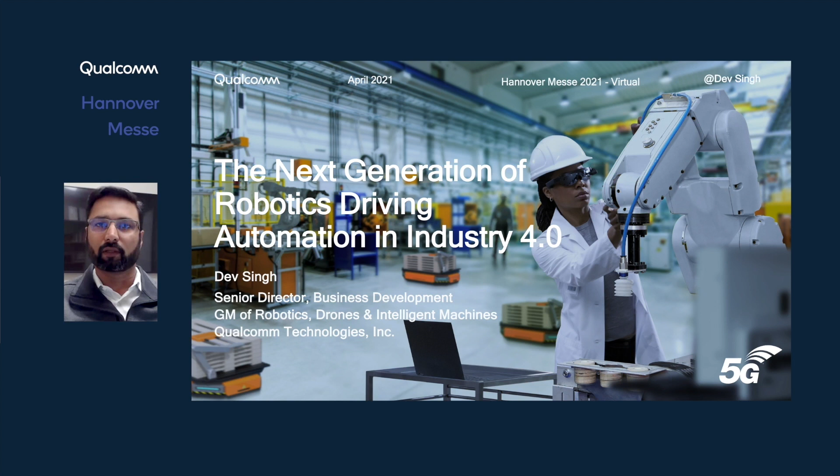So before we go into the topics of the presentation, I'm sure most of you are familiar with Qualcomm, but just giving a benefit of doubt, Qualcomm is a leading innovative company. We've been innovating with sustained innovation over 30+ years. We spend over $5+ billion in R&D year on year. Cumulatively, we have $64 billion in R&D put in, making sure we have the leading edge technology, which results in over 130,000 leading patent applications and creating technology that's revolutionizing how the world computes, communicates, and connects.

So Qualcomm has digitized mobile communication, redefined computing, and now we are transforming industries. Qualcomm has all the assets and is pioneering technologies that are fueling this future, be it connectivity from anything like low power Bluetooth all the way to 5G and everything in between. We have the technology that we are building. And on processing, compute is important. We have a lot of processing power in our Snapdragon chipsets, including CPU, GPU, DSP, and all of it.

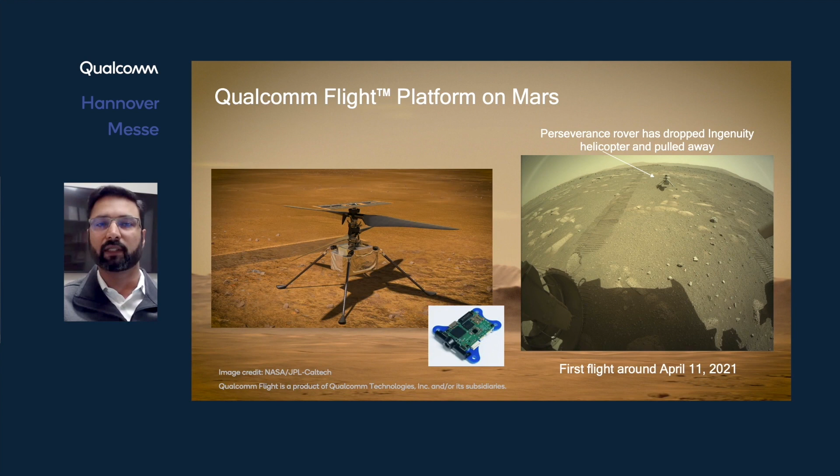We have been doing this for over 5 years now, since I set up this business segment in Qualcomm. We've had numerous robotics products launched. We are deploying millions of robots, be it consumer, enterprise, industrial, or factory robots. And the scale is limitless. We are putting floor scrubbers in factories to also putting our chips that are powering the Mars mission. The Ingenuity Mars helicopter is powered by Qualcomm as well.

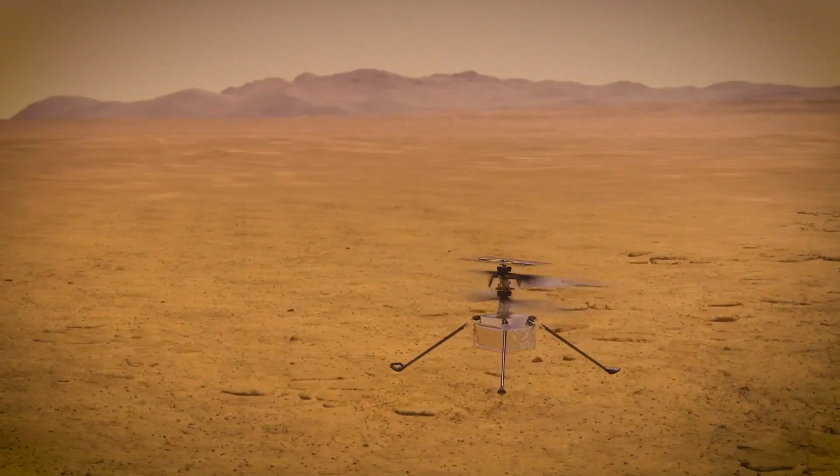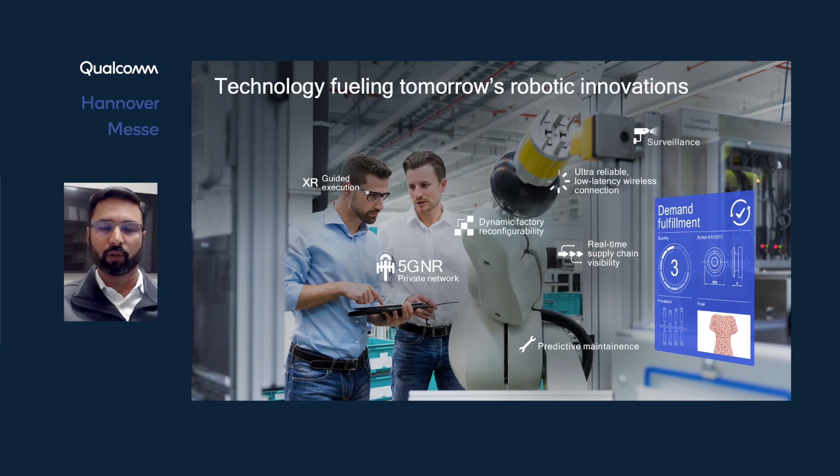Today's topic, I would want to cover the technologies that are fueling tomorrow's robotics innovation. Those primarily are heterogeneous computing, distributed intelligence, AI, and connectivity. So let's go briefly into each of these, starting with heterogeneous compute.

So heterogeneous compute, we all know that compute is very, very important in automation and in robotics. When you talk about computing, anything that comes to mind is a CPU or GPU, but the magic is, or specialization is key for automation and robotics. Assigning right tasks to the right engine is key. You want to use energy efficient engines for things that need low power, real-time applications. You need sequential control, you would use CPU. And when you need parallel data streams, you would use GPU. But all of this needs, like we mentioned, a specialized block for that.

We also have blocks that do dedicated neural processing engines that do AI with ultra fast inferencing. And one other anecdote we have is computer vision. Traditionally, computer vision was done on CPUs and GPUs, but we know that it is much more efficient to do that directly on a computer vision accelerator. In our Snapdragon processors, we have CVP, or CV enabled ISPs, that offload the GPU and CPU from these tasks. So that's the heterogeneous compute. It is the foundation of building the right automation and right robotics products.

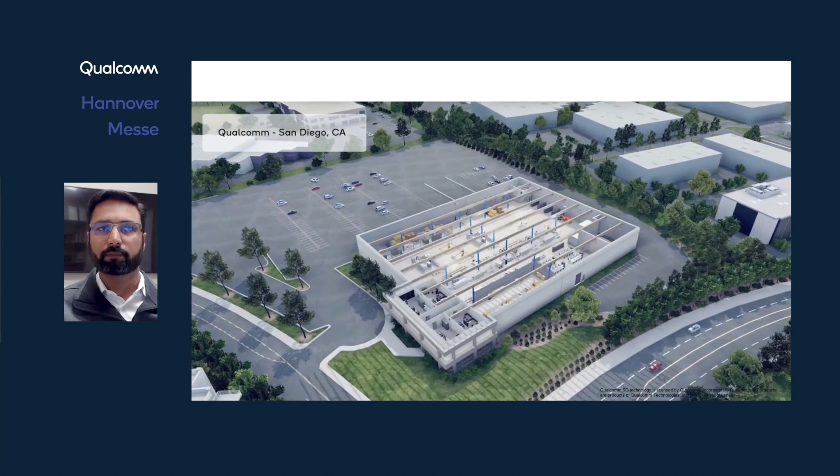So let's talk about a few of these, specifically around time-sensitive networks. 5G not only is a technology of the future, but it also helps maintain continuity, upgrading existing industrial networks with wireless 5G. Today, machine-to-machine communication is done using Ethernet, so Ethernet over wireless is possible with 5G, and we will see some of these. Time-sensitive network is one of them, and we have a brief video to go over that.

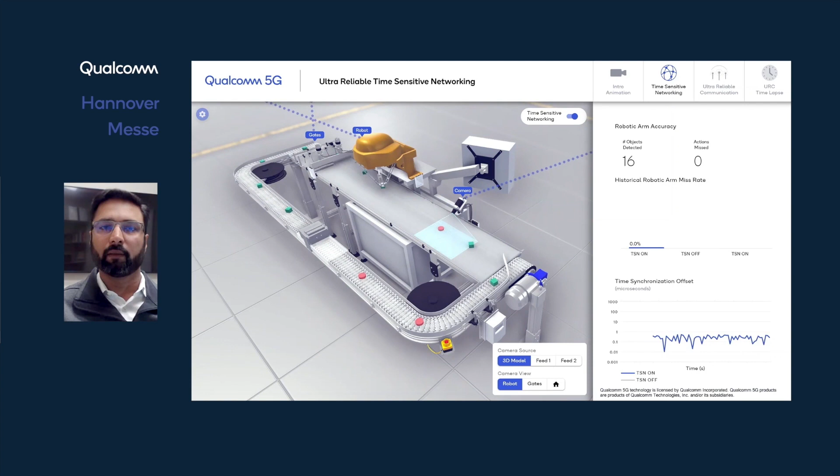In this video, you'll see a conveyor belt on a manufacturing floor where you have a product moving on the conveyor belt and being observed by cameras, and those are connected with 5G. These cameras are communicating with the robot, the Delta robot, to pick up the product based on the binning.

In this demo, you will see with time-sensitive network on, the green and red pucks representative of different classes or bins of products. When the time-sensitive network is on, the accuracy of this picking and binning is 100%. But when the time-sensitive network is off, you will see a lot of misses. So that gives a brief overview of the impact of 5G time-sensitive networking, where tight communication between machines is very important for these kind of applications.

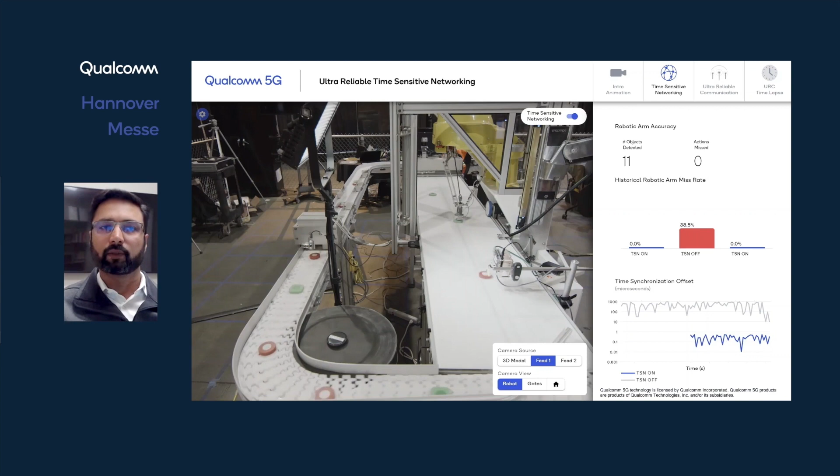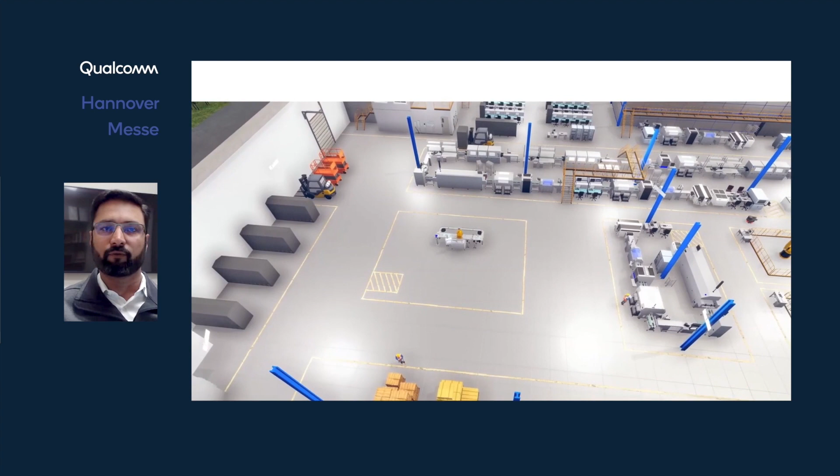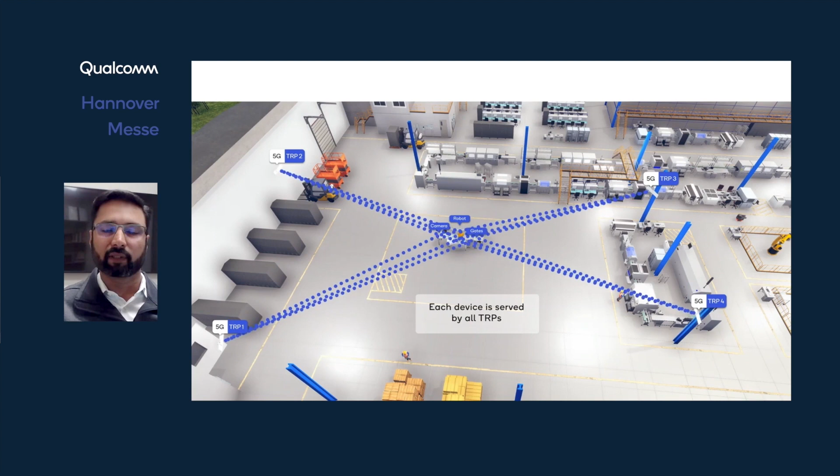So next one is the ultra reliable low latency, and we'll see a quick demo of that as well. This is also in a factory floor. So now we are talking about wireless communication in the factory floor, cutting the Ethernet cord and having everything done by wireless using 5G. But imagine this with previous technologies, would it even be possible? The short answer is no.

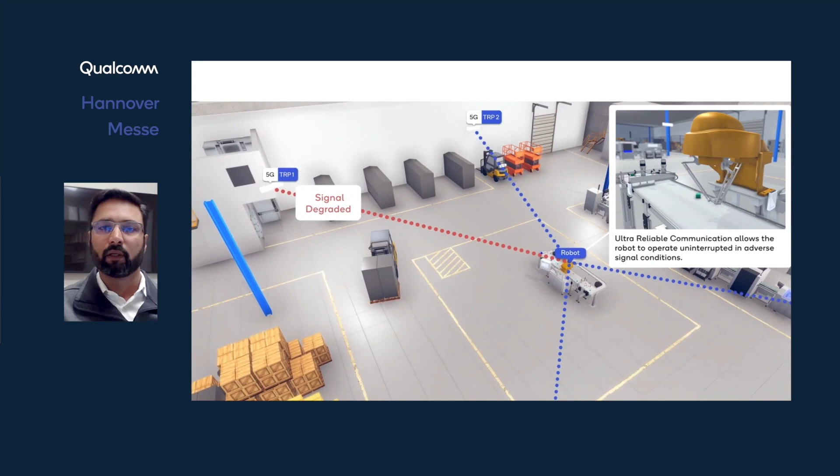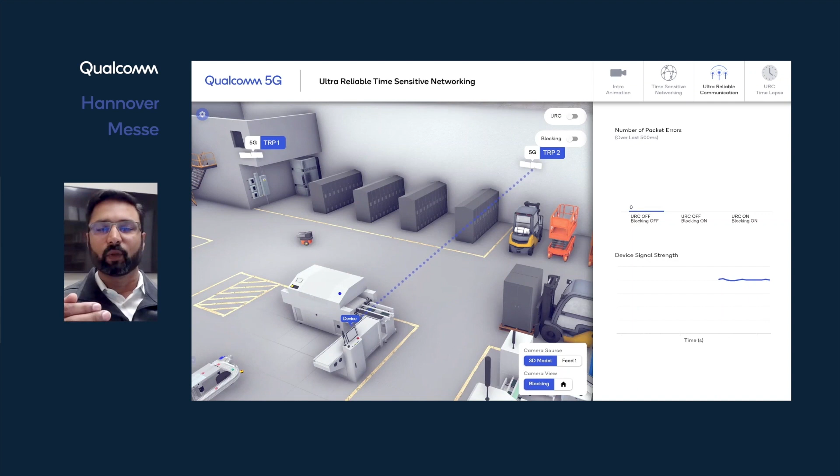The reason is 5G comes with sub-6 and millimeter wave deployment, where you have multiple TRPs talking to the device. You'll see redundancy is built in. When there is something in front of the signal blocking it, there is still continuity with the other TRPs happening. So there is high reliability right there because of this ultra reliable low latency feature we talked about.

So next is precise positioning. Why precise positioning is important is for multiple reasons. When you have robots moving around, taking things from the bins and bringing them back, you need them to be able to do that accurately and with low latency as well. So 5G release 17 is coming with precise centimeter level accuracy as one of its features, and we have a brief demo to go over that.

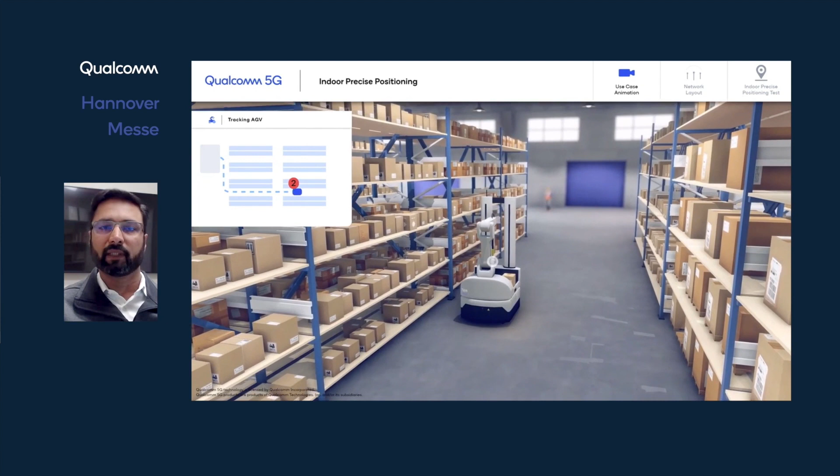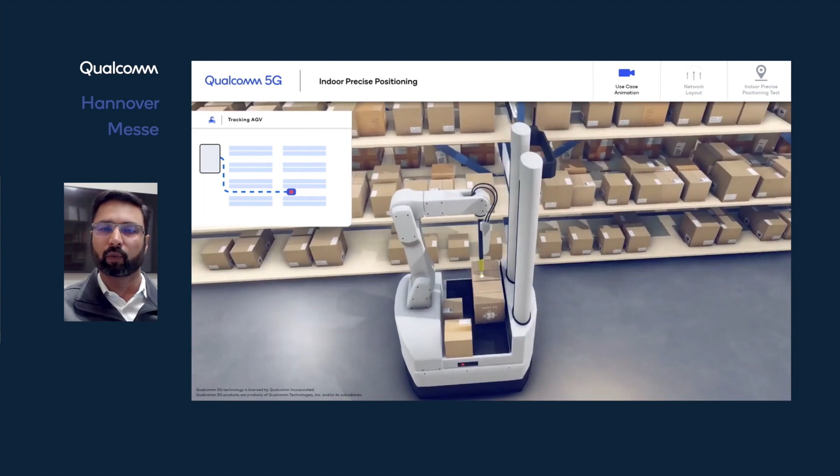In this demo, you'll see that there is an AGV or AMR that is basically picking from the shelf a product or several products and taking it to the desired location. But to be able to do this traditionally, you would need a lot of compute and a lot of sensor processing, and still not be able to achieve the accuracy you want. But with 5G, because of the different TRPs, you are able to precisely locate where the 5G device is. There's multiple directional antennas, 4x4 MIMOs, and technologies like millimeter wave making this possible.

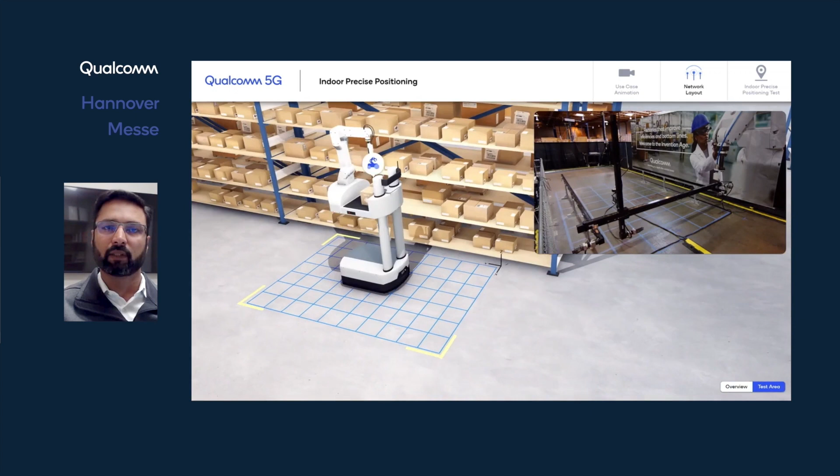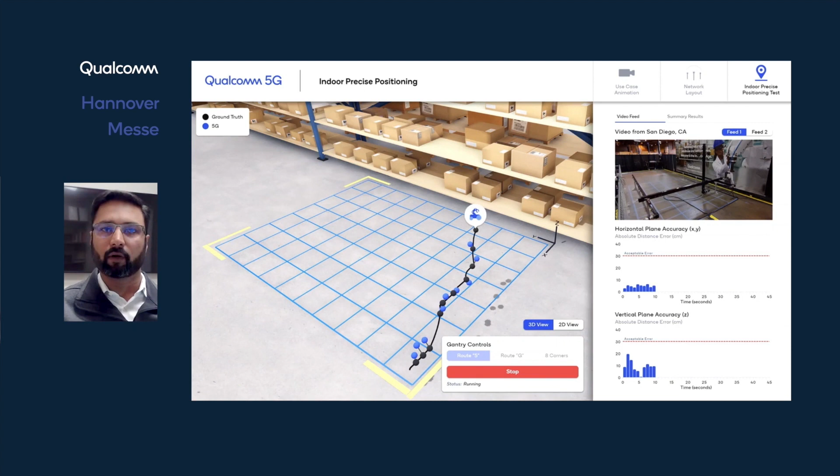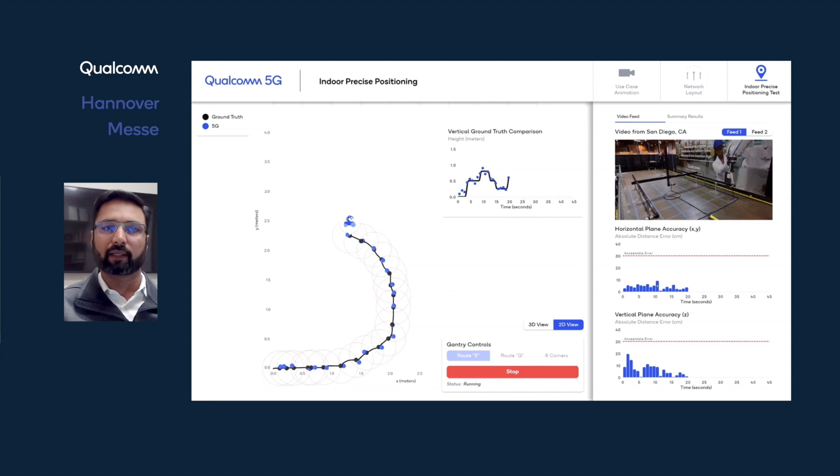So in this demo, you're going to be seeing a 5G robot, but on the right side, you're seeing that we are doing this experiment in our labs with one of the 5G devices. You can see there is a ground truth of the position, and then there is a 5G location, and it's pretty darn close, both in horizontal and vertical accuracy. You will also see this in the 2D plane, where you see accuracy across the board. So that is one of the big innovations that 5G is bringing in release 17.

So we at Qualcomm have been pioneering, researching 5G for a long time. We've been first to the market with it. Not only are we first to market, we are already on our third generation of 5G. We released the X50, the X55, and now recently the X60 that supports millimeter wave, sub-6 aggregation. It's cutting 5 nanometer process, and it supports things like release 16 and release 17 as well. So we are at the forefront of 5G innovation, and we are taking it to the next level with these offerings that we have.

So we talked about AI and talked about 5G. These two technologies are independently changing the landscape, enabling a lot of use cases. But when these two technologies come together, the real magic happens. You will see a lot of use cases, especially in Industry 4.0, where private networks are needed, but at the same time cloud is not important. The concept of intelligent wireless edge becomes very, very important. It is actually very critical for this industrial IoT expansion.